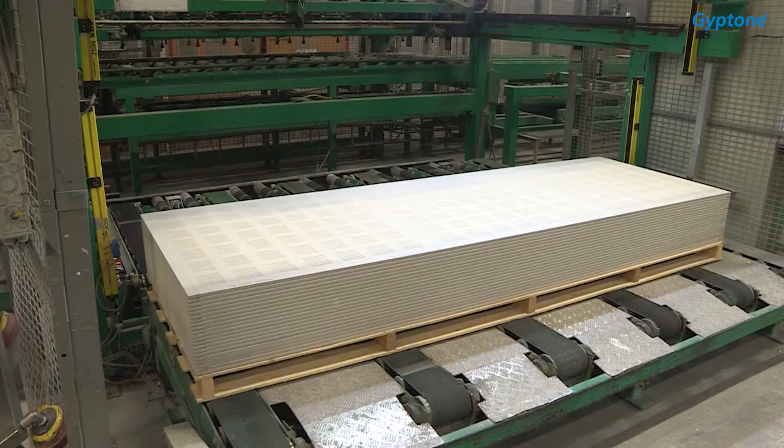Gyptone is sold and installed in more than 50 countries, with over 60 million square meters installed worldwide. Our passion is to create great living spaces by combining superior aesthetics, excellent performance, and best-in-class sustainability to improve daily life and enhance the well-being of people everywhere. Let's take a look at the next topic, design.

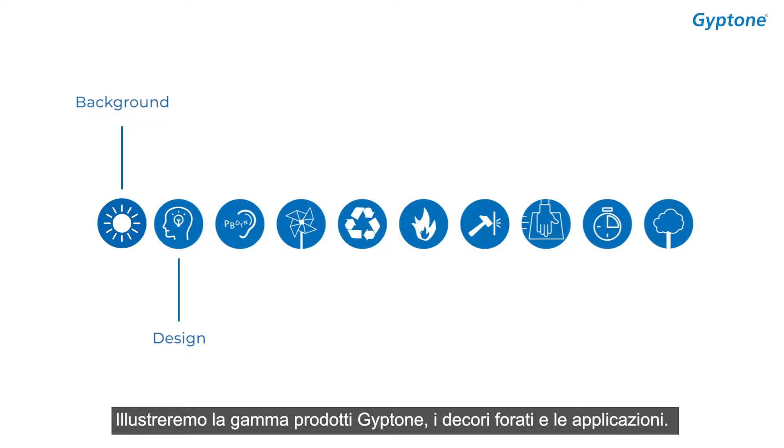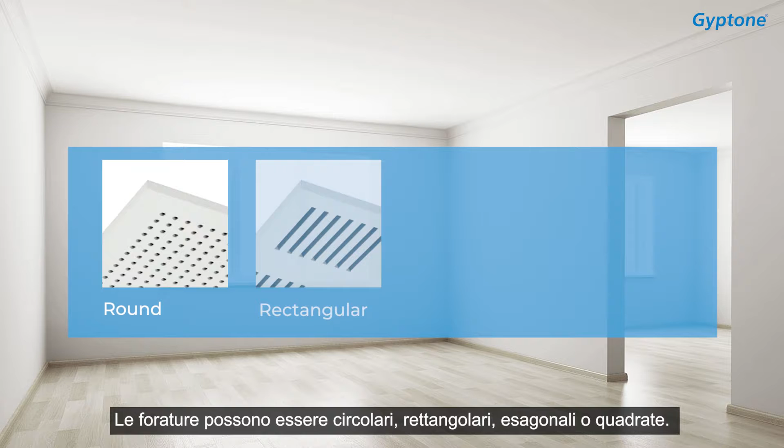This includes a review of the Gyptone product portfolio, types of perforation and applications. All Gyptone products are gypsum boards, either with or without perforations. Perforated gypsum is unique as it can be used for both ceilings and walls. The perforations can be round, rectangular, hexagonal or square.

Gyptone designs cover a range of different systems that can be used in many areas of construction, such as education, healthcare, hotel and restaurants, offices, commercial and residential. Gyptone products are divided into 5 different systems, each with its own advantages. Let's look at each system in turn.

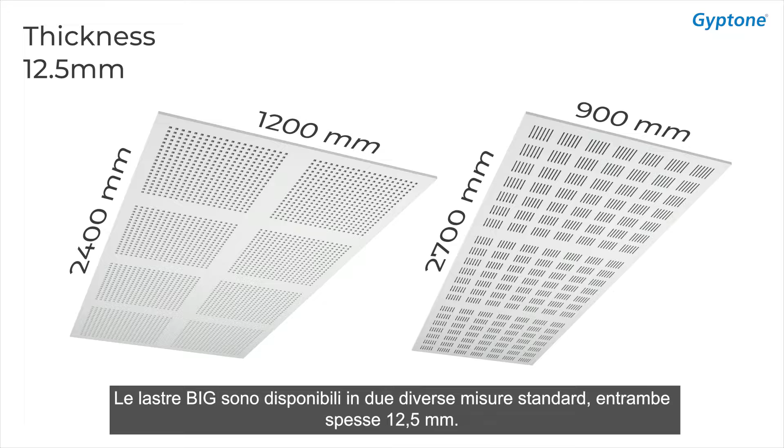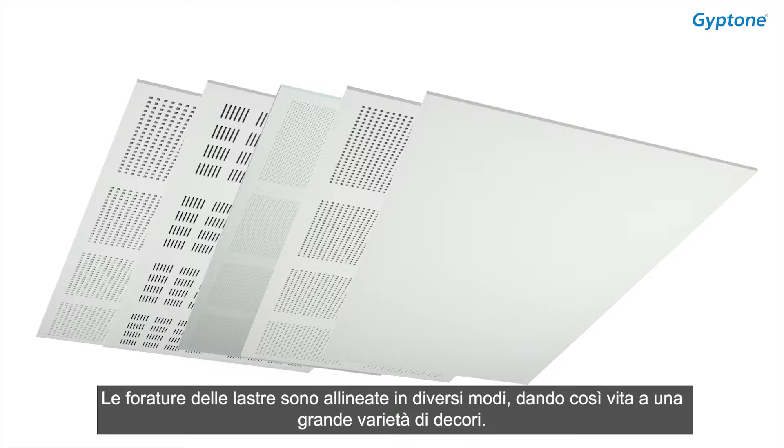Gyptone big boards are the ideal solution for large rooms that need an acoustic ceiling without any visible joints between the boards. The boards have a strong surface and even stronger connections, which makes them suitable for both ceilings and walls. We have 2 different standard sizes of big boards, both in a thickness of 12.5 mm. The range includes 4 standard perforation patterns and without perforation. The perforations are aligned in different ways, creating different board designs.

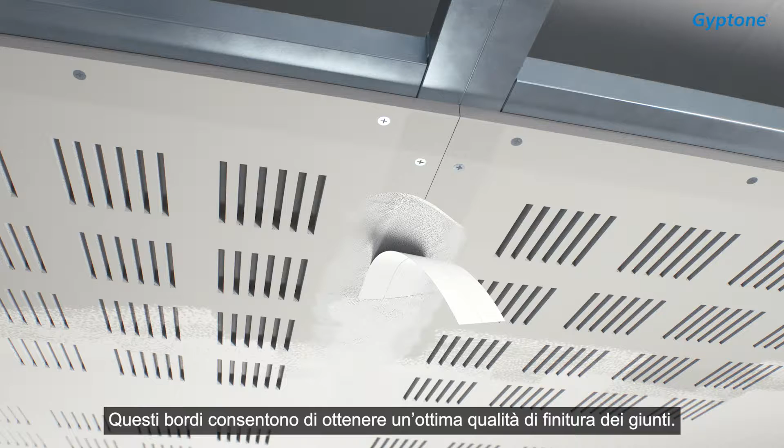Gyptone big boards are supplied unpainted, with 4 tapered edges. These edges provide a significantly improved foundation for flat filling and joint finishing. The final result is a smooth, attractive ceiling surface with no visible joints.

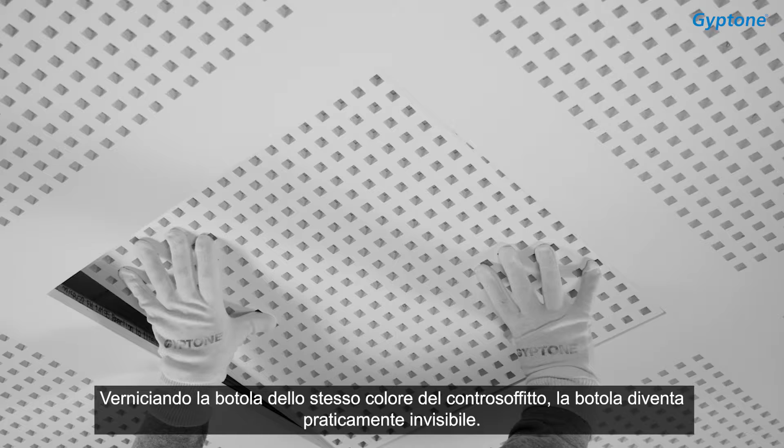Access panel. To access installations behind the ceiling, you can mount a Gyptone access panel with or without perforations. The Gyptone access panel is a gypsum-based hatch, which is fitted directly into the perforated areas of the board. The panel can then be painted in the same color as the ceiling, ensuring a seamless aesthetic solution.

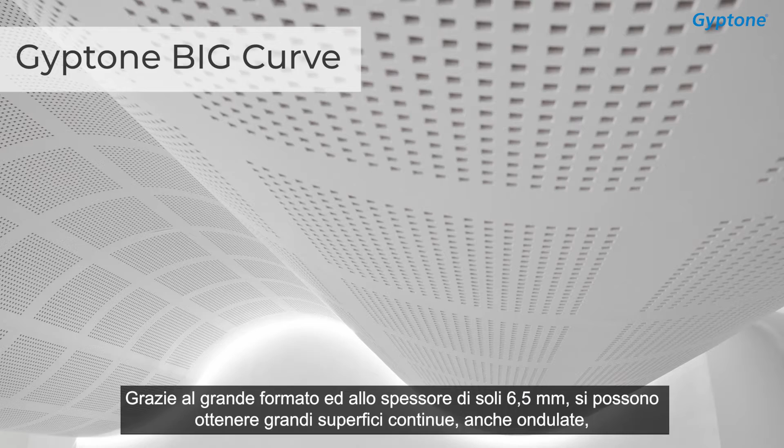Big Curve. Gyptone Big Curve enables you to create curved shapes in the ceiling. With the thin, large format boards, only 6.5 mm, you can create large, unbroken ceiling surfaces in soft waved forms without any visible joints or grid systems. Gyptone Big Curve products have long tapered edges. They are available in 3 standard perforation patterns, plus Big Curve base without perforations.

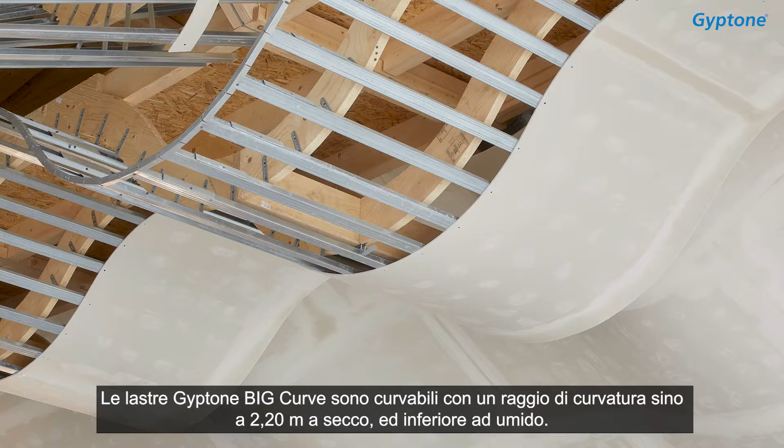Gyptone Big Curve can be combined with Gyptone Big Boards in large, continuous ceiling surfaces. There is also the potential to integrate the room's lighting as a natural part of the ceiling. Gyptone Big Curve can be dry bent to relatively small arcs, radius 2.2 meters, and to an even smaller radius by wet bending. This enables Gyptone Big Curve to be used for walls and balconies where small arches are desired.

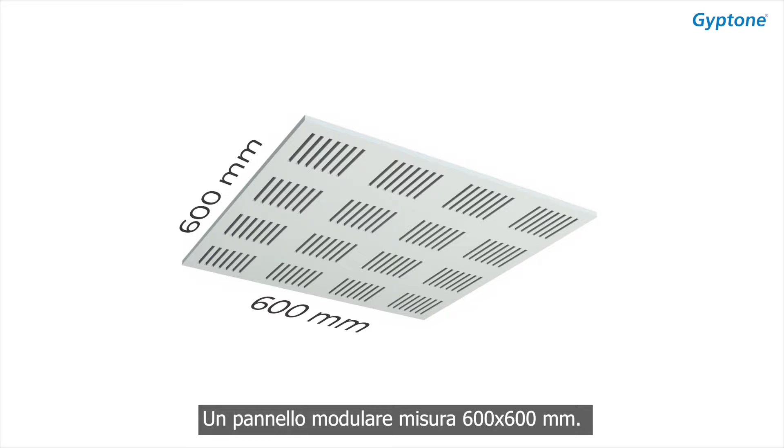Tiles. Gyptone tiles are the perfect solution for schools, offices, retail, and other environments looking to combine durability with good acoustic properties. A standard tile measures 600 mm by 600 mm. The product range includes 6 standard perforated patterns and a tile without perforation. These are aligned in different ways to create different tile designs.

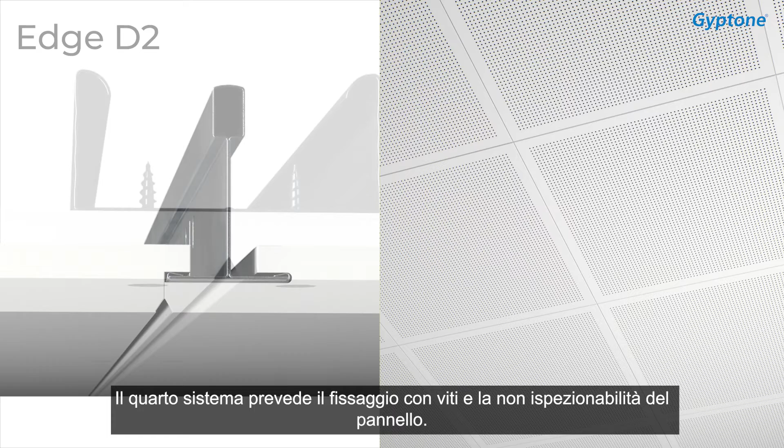Gyptone tiles are produced in 4 different edge designs: exposed grid system called Edge A, semi-concealed grid system called Edge E, concealed grid system called Edge D2. These 3 edge types are fully demountable. The 4th edge type is a non-demountable screw-fixed tile called Edge B.

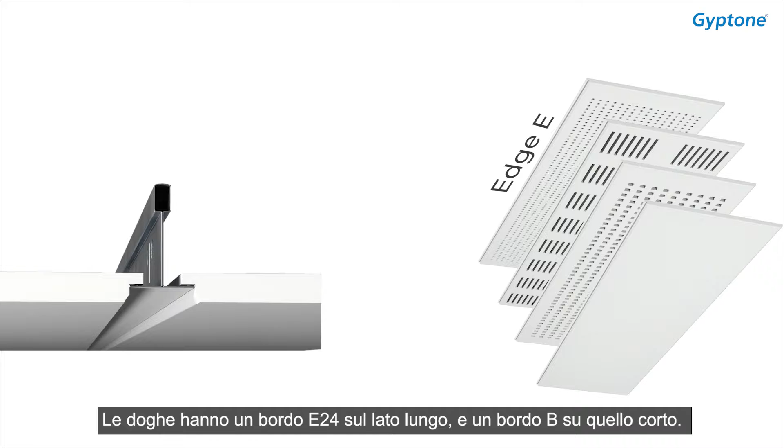Gyptone plank is the perfect acoustic ceiling in corridors and hallways where easy access to underlying installations is required. Plank product has Edge E24 on the long side and Edge B on the short end. The tiles are installed in a demountable semi-concealed grid system. If the standard 600 mm by 600 mm Gyptone tile does not meet your design needs, Xtensiv could be the ideal solution. These slim tiles create a completely different visual expression of the ceiling.

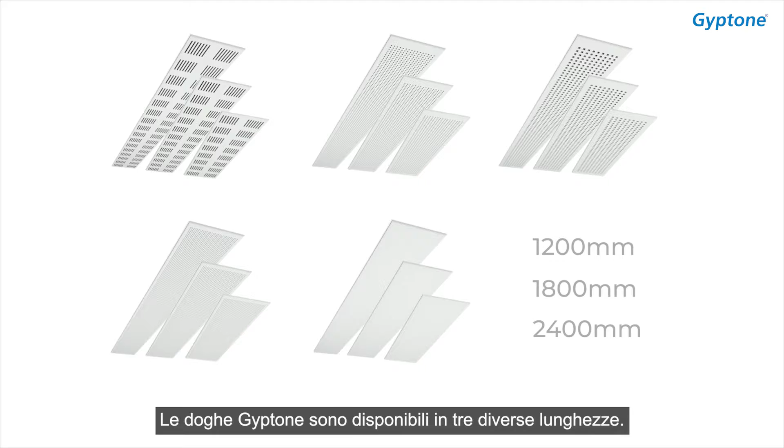Both plank and Xtensiv tiles are available in 3 different lengths. This product range includes 4 standard perforated patterns and a tile without perforation, and all can be used with either system. At just 10 mm thick, they are more ergonomic as they are easier to handle and cheaper to transport. These extended tiles can be point-loaded up to 1 kilogram.

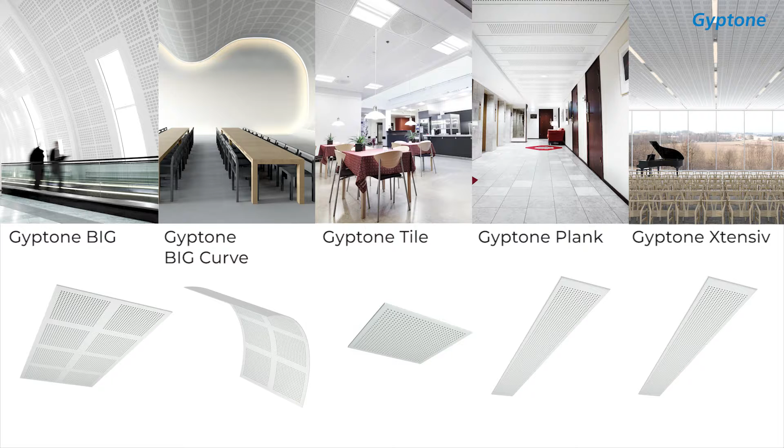The next topic is acoustics. We'll start with the basics of acoustics, so we fully understand the benefits of having a Gyptone ceiling installed. There are 4 main terms we need to understand when talking about acoustics: absorption, reflection, reverberation time, speech clarity. These terms are used to explain acoustic properties and to determine a good acoustic environment.

So, what is good or bad acoustics? The first thing to look at is absorption and reflection. An environment without any absorption means that noise will not go away and there is a very high reflection of the sound waves. With nothing to absorb the sound, the smallest noise can feel surprisingly loud and uncomfortable, like being caught in a room of glass.

Good acoustics means there is a fine balance between absorption and reflection. Nature often provides the best acoustic environment. Outdoors, such as in a forest, the balance can be just right. In these environments, sounds are heard clearly. Indoors, however, it is possible to overdo the absorption. If too much sound is absorbed, like someone talking into a pillow, you'll need to shout to be heard, and it is harder for the other person to clearly hear what you are saying. Not a good situation, especially in an environment like a school.

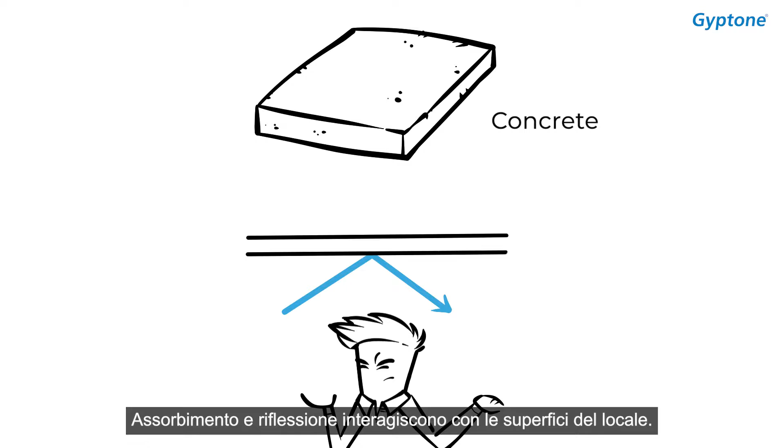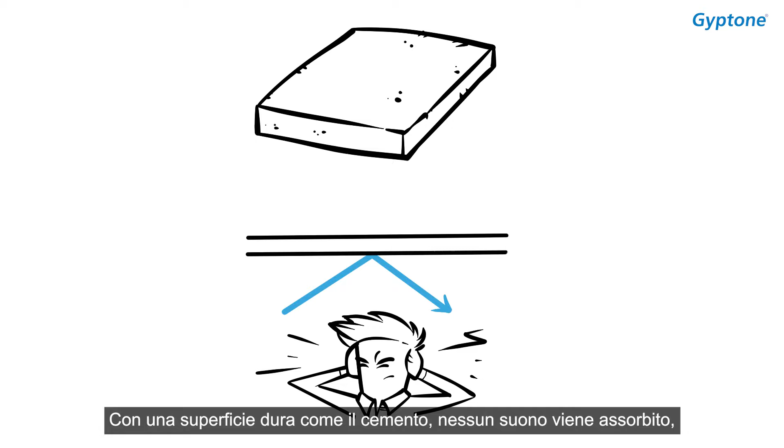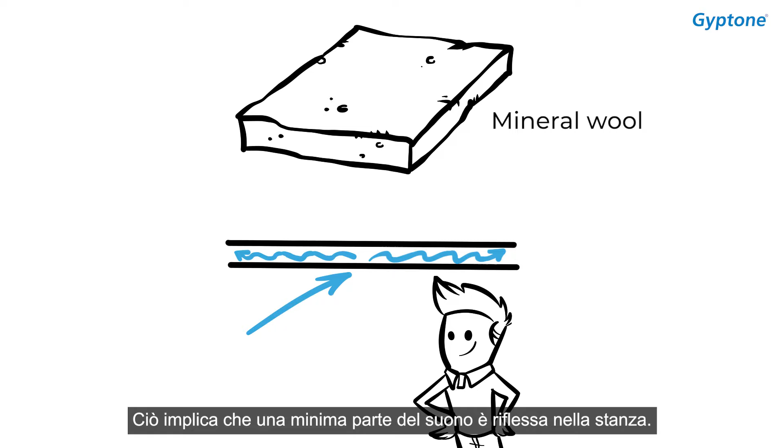Absorption and reflection relate to the surfaces in a room. Although it is not only the ceiling that contributes to absorption and reflection, it has a big impact because it is such a large surface. With a hard surface like concrete, no sound is absorbed. Instead, it is all reflected back into the room. When sounds hit porous surfaces like mineral wool, carpets, or curtains, they are mostly absorbed. This means that very few sound waves are returned into the room.

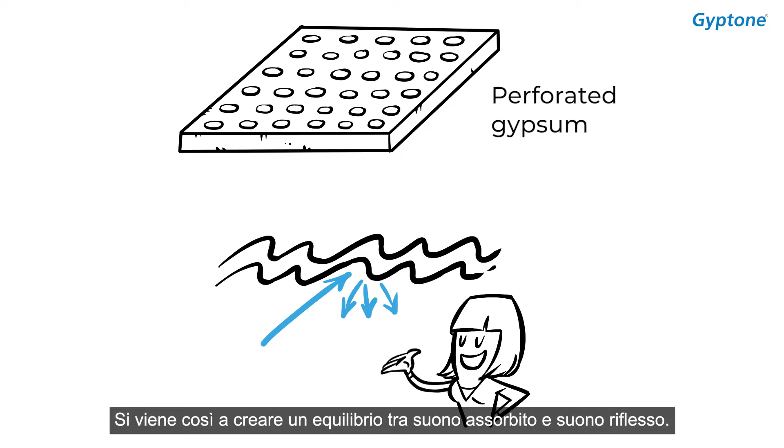With perforated gypsum, most sound waves are absorbed, but some are reflected. This creates a balance of absorbed and reflected sound waves. Because Gyptone products are perforated, we call a perforated gypsum board a diffuse surface. So why does perforated gypsum absorb sound so well when gypsum is a hard product? Take a look at this short video to understand how Gyptone products work in absorbing sound waves.

When a room contains only hard surfaces, it's bad news for our acoustic comfort. With nothing to absorb them, sound waves are free to reflect and bounce around the room, leading to uncomfortable, distracting and stressful noise levels. Installing a gypsum ceiling that's specially designed to improve the acoustics in a room transforms the sound environment. Let's take a closer look at how it works.

When you use a perforated plasterboard rather than a smooth ceiling, the surface is no longer hard, giving space for some of the sound waves to be absorbed. The back of the plasterboard is also fitted with an acoustic tissue, absorbing and breaking up even more of the sound waves as they pass through the perforations. Here's what happens when sound waves hit the perforated surface.

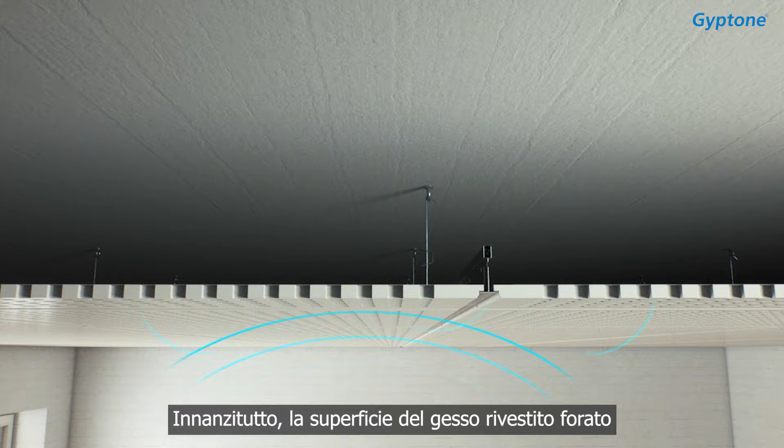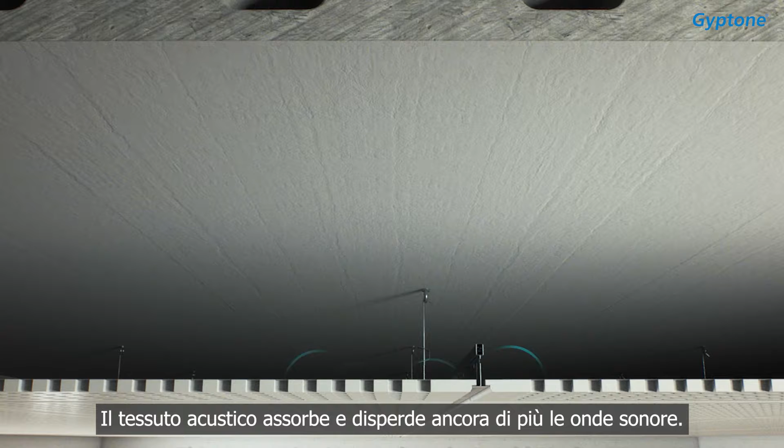First, the surface of the perforated plasterboard reduces the energy of the sound waves before reflecting part of them back into the room. Meanwhile, the remaining sound waves pass through the board and up towards the acoustic tissue. The acoustic tissue absorbs and breaks up the sound waves even more. Only very low energy sound waves remain, bouncing around in the empty space above the boards, and only an even smaller fraction of these low energy waves make it back into the room. By using acoustic gypsum ceilings, you can control reverberation time, increase speech clarity, and create a more pleasant acoustic environment.

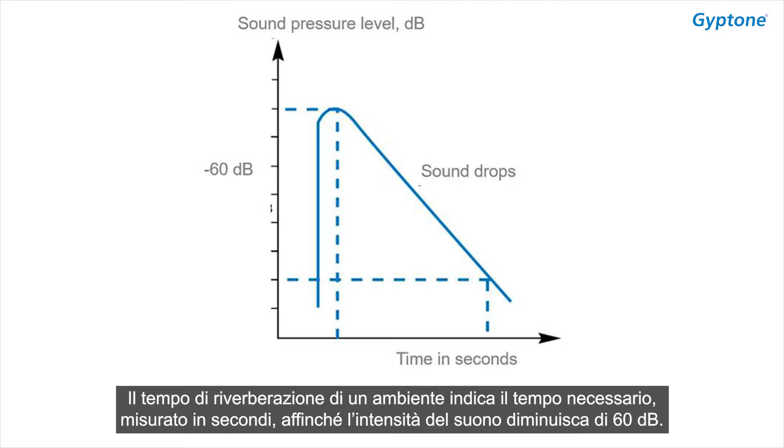To figure out if you have good or bad acoustics in a room with high or low absorption, we use the term reverberation time. The reverberation time is the time it takes the sound pressure in a room to drop 60 dB, measured in seconds. Let's listen to the same sound but with 3 different reverberation times. Can you hear the difference? First, listen to a reverberation time of 2 seconds.

I wish I'd done something I could be proud of.

This is very long, like you might find in a church. The next reverberation time is much shorter. This time we are down to 0.5 seconds, which is common in classrooms and some offices.

I wish I'd done something I could be proud of.

Finally, we have a reverberation time of 0 seconds. This means that all sound waves are absorbed and no reflection is present.

I wish I'd done something I could be proud of.

Like the first sound with a very long reverberation time, a very short one can also be harmful to the acoustic environment.

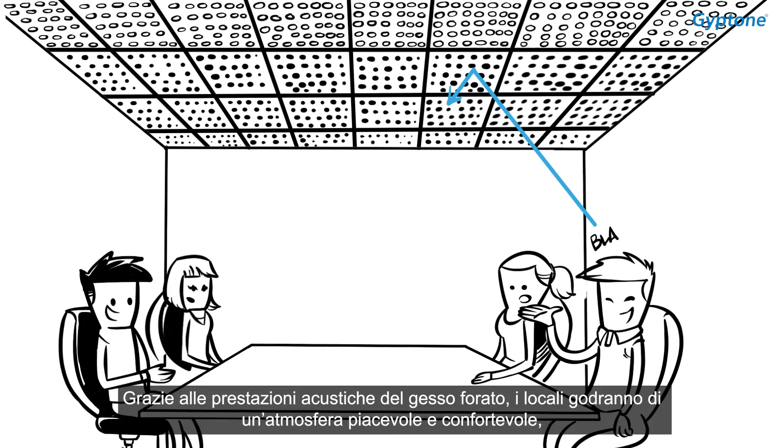In a room with poor acoustic performance, sounds will reverberate constantly, creating an unpleasant and uncomfortable acoustic environment due to the long reverberation time. But with the acoustic performance of perforated gypsum, rooms benefit from a pleasant, comfortable atmosphere, ideal for productive workplaces due to the optimum level of absorption and reflection.

Let's look at a common example where Gyptone products can help create a pleasant acoustic environment. Good acoustic comfort is the ideal acoustic environment due to an appropriate acoustic reverberation time and high speech clarity. Congratulations on your dream home. Very nice, with hardwood floors, vaulted ceilings and large windows, energy efficient, stylish and modern.

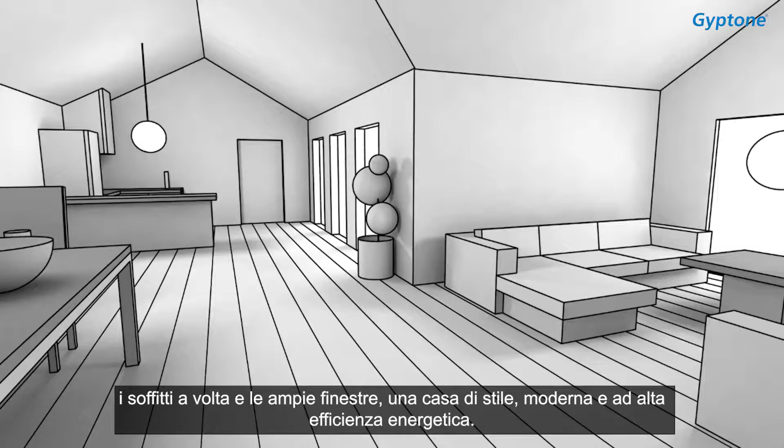But why does it sound like this when you try to have a conversation over dinner? Why does it sound like a train station when the boys are playing at the other end of the house? Or when Louise is cooking? And you can barely hear yourself think when Sophie is talking on her mobile and the dog is barking. These everyday sounds become noise as they're bounced around the rooms, creating a poor sound environment.

But there is a good solution. Lining your ceilings with acoustic boards that absorb the noise will create a peaceful and pleasant sound environment in your new home, and you and your family can talk in a normal tone of voice.

Gyptone acoustic boards have a fine perforation that, coupled with the underlying tissue, provides excellent acoustic properties. The boards are integrated as a natural part of the remaining ceiling, without visible joints, giving the ceiling a beautiful and uniform look. But first and foremost, you get a quiet and comfortable home.

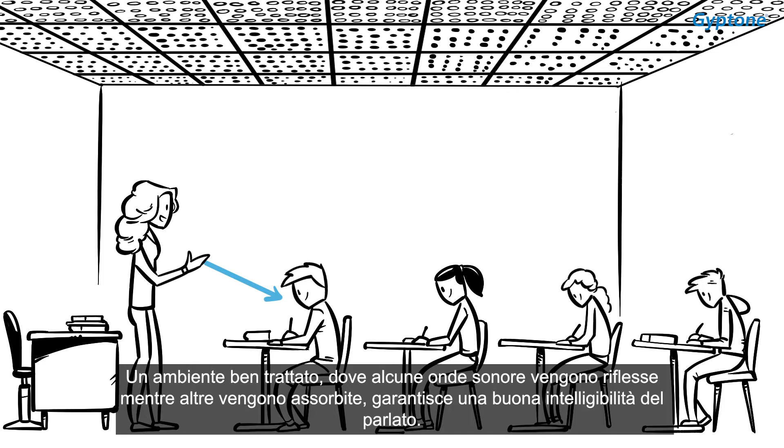A sound-regulated environment, where some sound waves are reflected while others are absorbed, ensures good speech clarity. Good speech clarity is equally important in homes as in classrooms, where it is important to deliver a message from one person to another, especially in a classroom where students sitting at the back need to hear the teacher just as clearly as those sitting at the front. This is vital to students' ability to learn, as has been proven in many studies.

Let's see how we can improve both the reverberation time and the speech clarity in a classroom. This is a typical medium-sized classroom. Everything in a room influences the acoustic environment. If a room has nothing in it and just hard surfaces, it will produce a very long reverberation time, and it will sound like this. You are seated in the back of classroom 19 from building 352 in DTU.

To optimize the acoustics in a room like this, we need to add some absorbing material, like a Gyptone ceiling. Furniture will also be added to the room. Just by adding a Gyptone ceiling, we can lower the reverberation time to make a pleasant sound environment for students and teachers. You are seated in the back of classroom 19 from building 352 in DTU.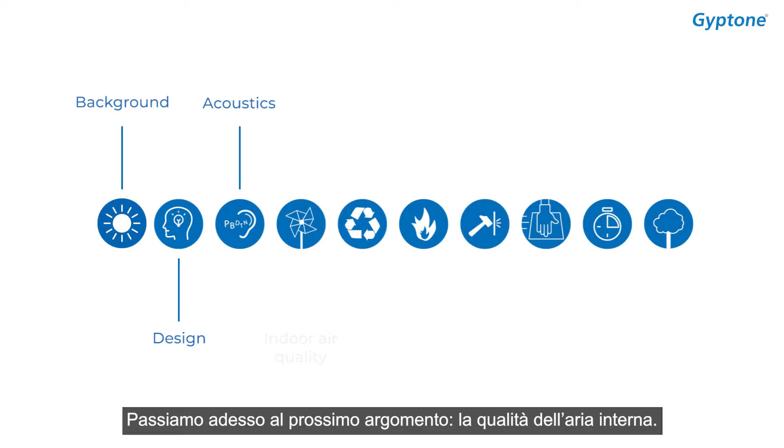Now we'll move on to the next topic, indoor air quality. Gypsum is a natural product. Most of the gypsum used for Gyptone products comes from quarries in Spain. Natural gypsum is such a clean product that it is used in many other applications other than plasterboard production, such as brewing, chocolate, toothpaste, and many others. So, the next time you eat a Kit Kat, look for gypsum in the ingredients.

Gyptone products are made only from gypsum's all-natural ingredients. No harmful substances are used. Gyptone products are able to achieve some of the toughest indoor climate certifications. Gyptone ceilings have received the highest approvals in indoor climate tests from Danish indoor climate ratings, A+ and M1, meaning they contribute to a healthy indoor climate.

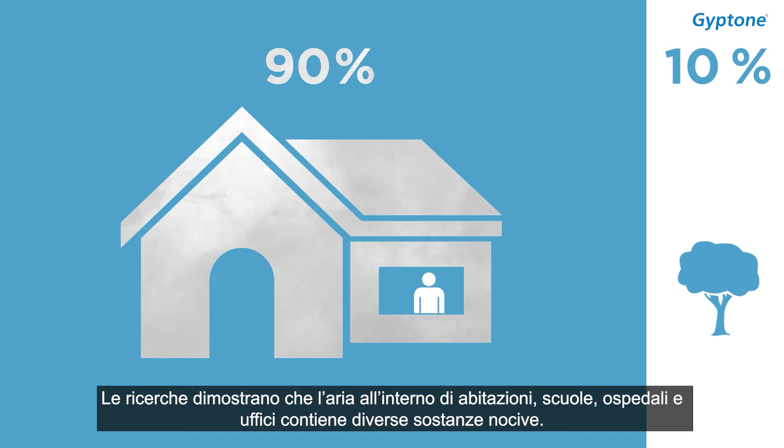Gyptone is not only a very clean product, it also helps to clean the air of harmful substances from its surroundings. This short film we are going to watch now explains how Activ'Air contributes to a better and healthier indoor climate. People spend approximately 90% of their time indoors. Research has proven that there are many harmful substances in the indoor air of residences, schools, hospitals, and offices.

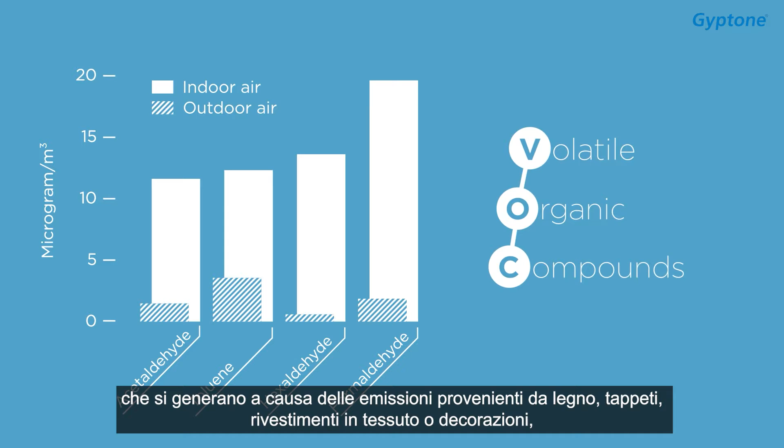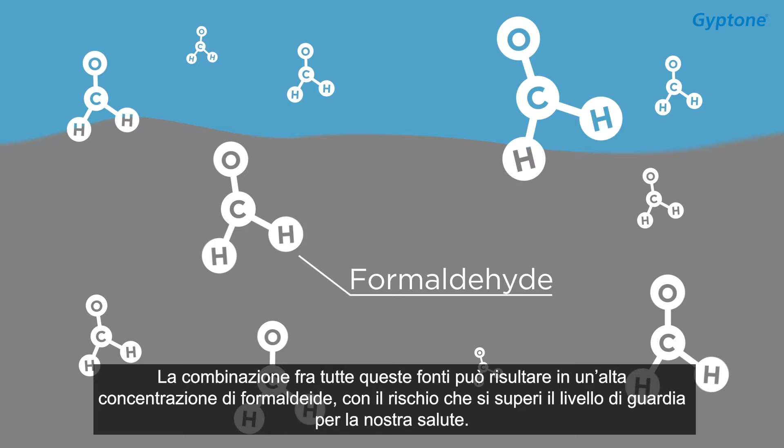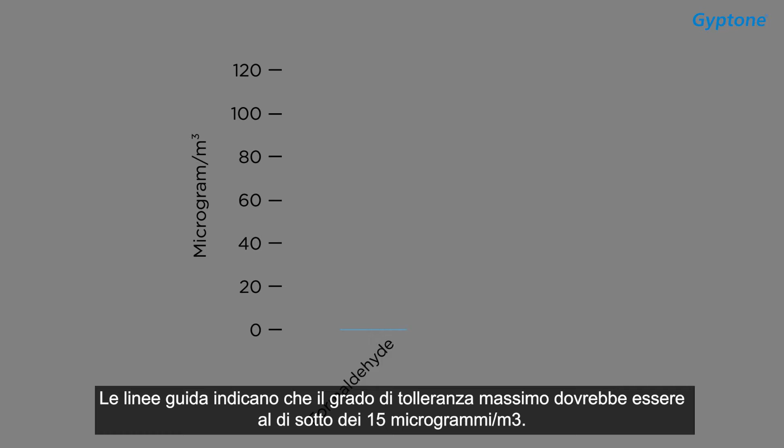These harmful substances are mainly present in the form of volatile organic compounds, or VOCs, and appear due to the emissions from wood, carpet, fabrics used for furniture or decoration, and people's activities such as cooking, cleaning, ironing, heating. The combination of these sources can create a very high concentration of formaldehyde, exceeding what our health limits can tolerate. Symptoms can be burning and watering eyes, burning of the nose and throat, coughing, and difficulty in breathing. Guidelines indicate the maximum tolerance should be below 15 micrograms per cubic meter.

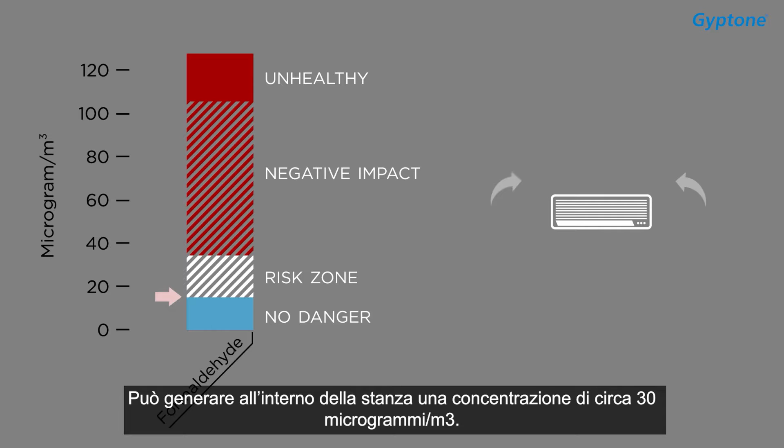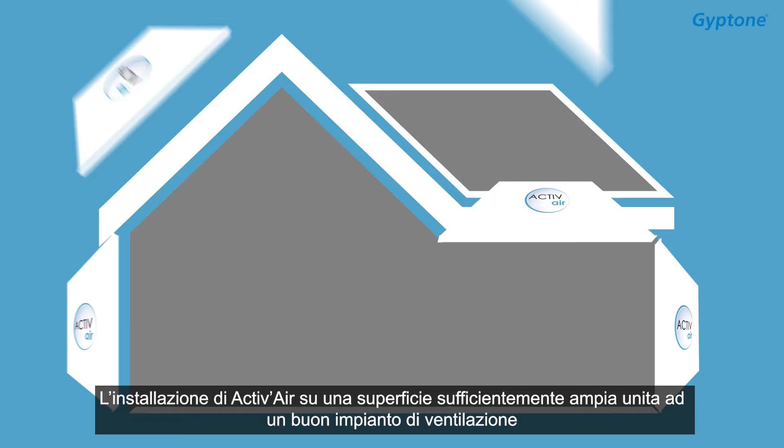Even with a ventilation system installed, in line with the guidelines, it is still possible to have a room with a concentration around 30 micrograms per cubic meter. This is why Saint-Gobain has developed a technology that removes formaldehyde permanently out of indoor air by transforming the product into an inert compound: Activ'Air. Only with a sufficient surface of Activ'Air installed in a room combined with well-performing ventilation will one achieve safe levels of formaldehyde in the indoor air.

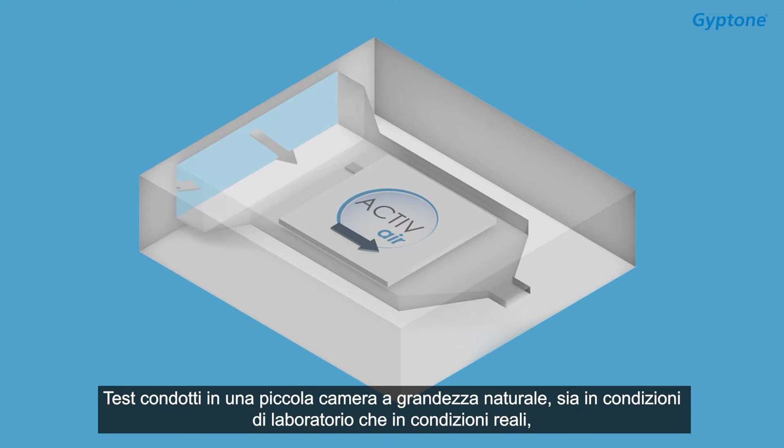The effectiveness of the Activ'Air process has been proven by tests conducted in all kinds of circumstances. Tests performed in a small chamber, on a real-life scale under laboratory conditions, and in real life have proven that Activ'Air absorbs 70% of the concentration of formaldehyde. These results easily prove that Activ'Air can create a healthier indoor environment.

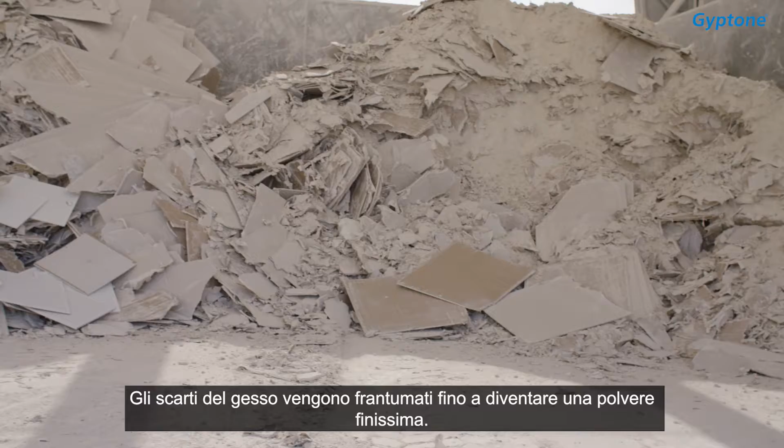Gyproc has an established recycling system that collects gypsum waste from demolition sites, building sites, and recycling stations for use in new gypsum products. All the gypsum waste is crushed and separated into fine gypsum powder. The gypsum powder from the recycled gypsum products is now ready to become new gypsum products, together with the natural gypsum. Gyptone products consist of more than 25% recycled gypsum.

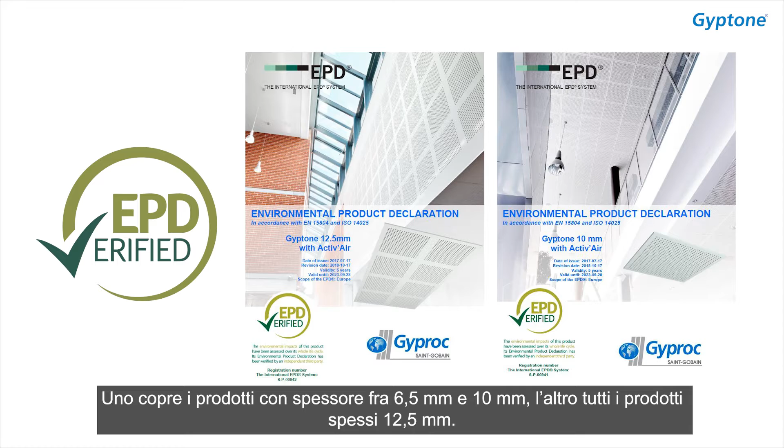To lower Gyproc's environmental footprint when producing gypsum products, we take care of having updated EPDs on our Gyptone products. Gyptone has 2 EPDs which are third-party verified. They cover all Gyptone products and are divided by the thickness of the products, one covering 6.5mm and 10mm products and the other covering 12.5mm products.

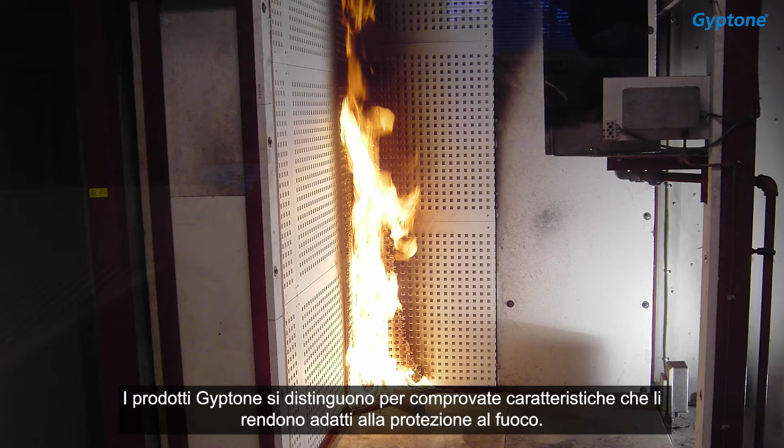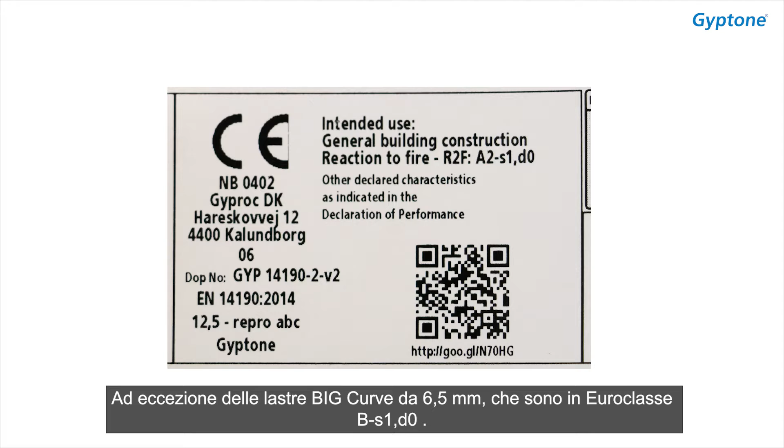The next topic we'll look at is fire. Gyptone products have some unique, well-proven fire protection characteristics. All Gyptone products are tested as part of the CE marking system. These tests show that our products can achieve a reaction to fire classification of A2-s1,d0, except the 6.5mm Big Curve product, which has a classification of B-s1,d0. As part of the CE marking process, we also have verified DoPs, Declarations of Performance, for all our products in many different languages. These can be downloaded from the Gyptone website.

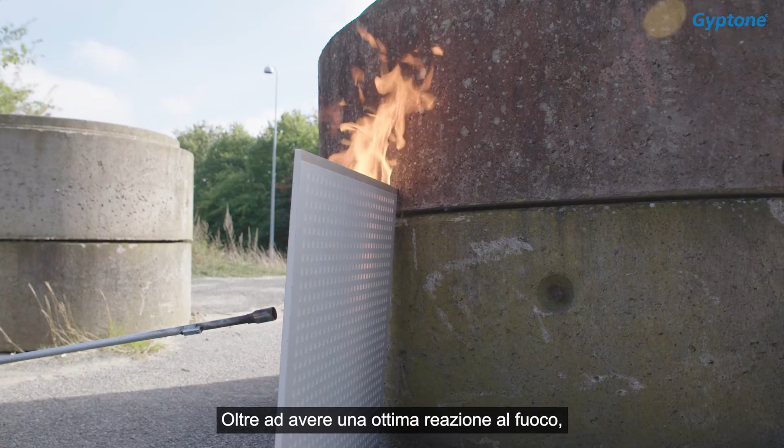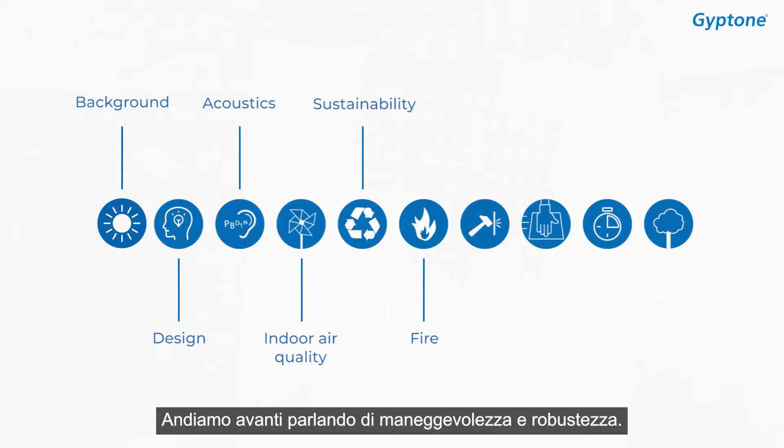Gyptone products do not only have a high reaction to fire classification, they can also fire protect up to 10 minutes in applications where the product is screw attached to a subframe of wood or steel. You might wonder how this is possible, with perforations running through the product. It's because the gypsum core is made from 20% crystallized water. This acts like a built-in sprinkler system. When the crystallized water is subjected to heat, it releases a cooling vapor that lowers the temperature from the fire. This prevents the liner and acoustic tissue from catching fire, and means the Gyptone product is fire protected for up to 10 minutes.

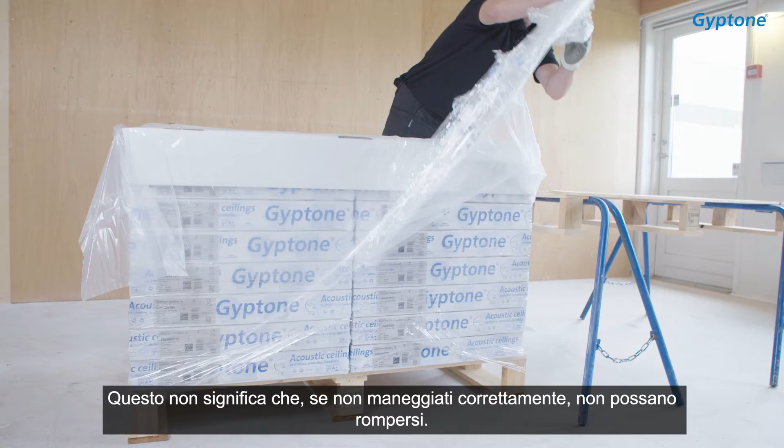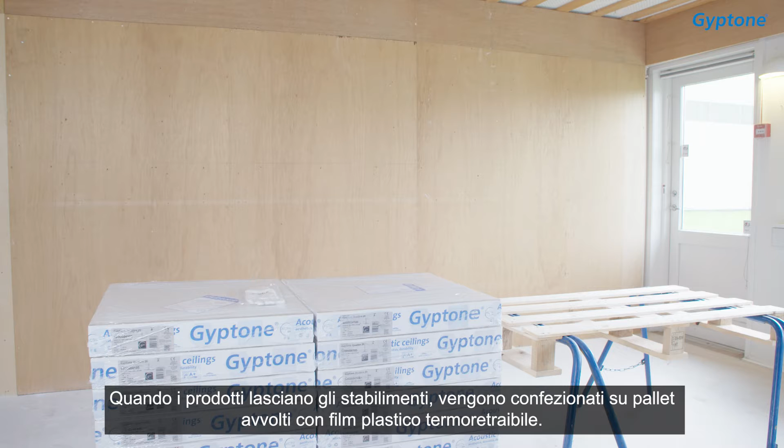Next up, let's explore handling and robustness. Gypsum products are robust, which makes installation easier and less stressful. But it doesn't mean they cannot break if not handled correctly. They need to be protected from external elements like rain and snow, and you should be careful not to bump into hard objects that could damage them. When the products leave the factory, they are well protected with shrink-wrapped plastic and placed on a pallet. Each pallet comes with a pair of gloves to protect the products during handling, plus a handling manual for that specific product.

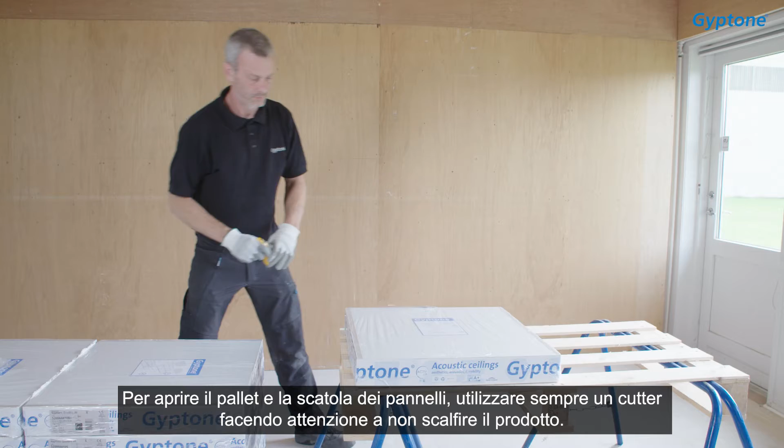You should always use a knife to open a pallet and a box of tiles, taking great care not to cut into the products inside. When cutting into a box of tiles, always cut into the cardboard and not the top of the box, to avoid cutting into and damaging the tiles.

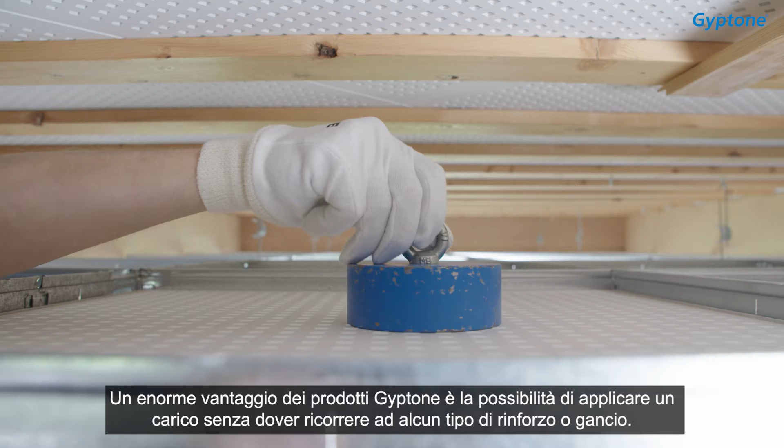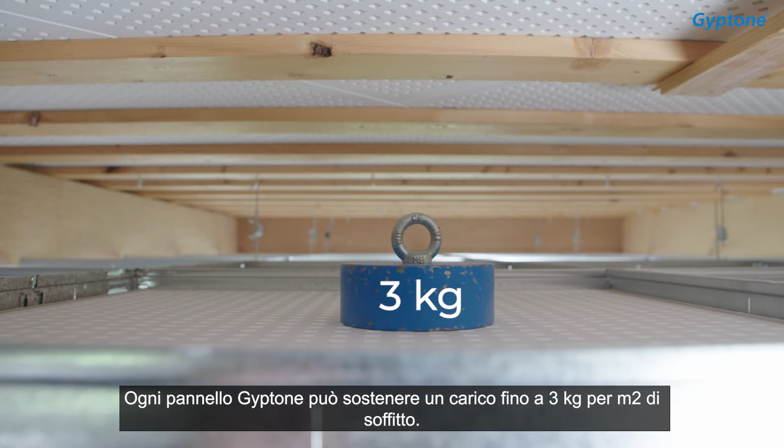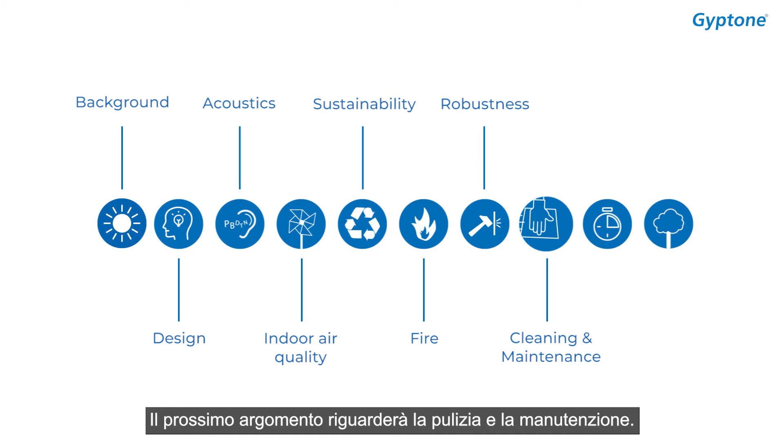The next topic is cleaning and maintenance. Many Gyptone tiles come with a painted surface.

Even though it is durable, the surface can still get damaged or dirty during installation. For seriously damaged tiles, the best solution for demountable tile systems is simply to replace the tile. A common issue is dirty finger marks on factory-painted products, usually due to handling during installation or infrastructure maintenance. The first lesson is always to use gloves when handling painted Gyptone products.

When painting a perforated plasterboard, however, there are some things to bear in mind. Always use a short-haired roller. Never use spray paint. This is to avoid contaminating the acoustic tissue on the back of the product with paint. If paint gets on the acoustic tissue, the acoustic performance will be affected, as it becomes harder for the sound waves to penetrate. The next topic we'll look at is installation.

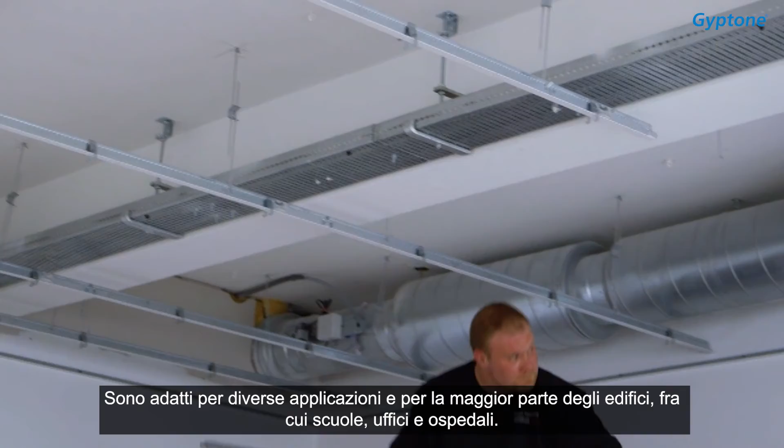Gyptone ceiling systems are some of the most versatile ceiling systems on the market. They are suitable for many applications and most segments, such as schools, offices, and healthcare facilities. One of the big benefits of Gyptone ceiling systems is the ease of installation and the guidance and support available to ensure installation goes smoothly. On the website, there are installation manuals and videos for all systems. Let's look at an installation video in more detail.

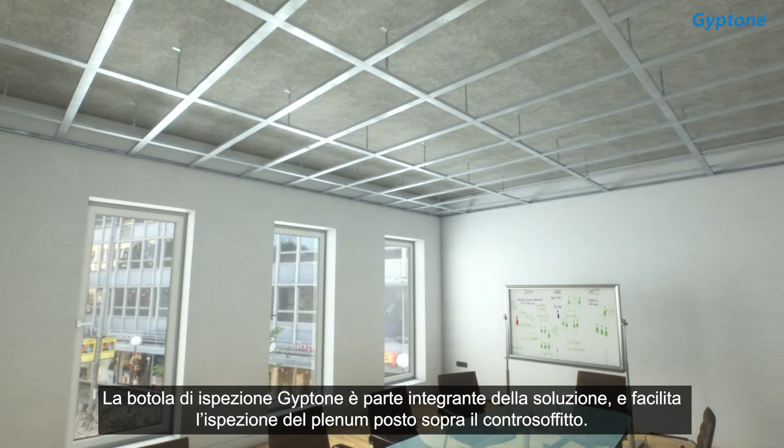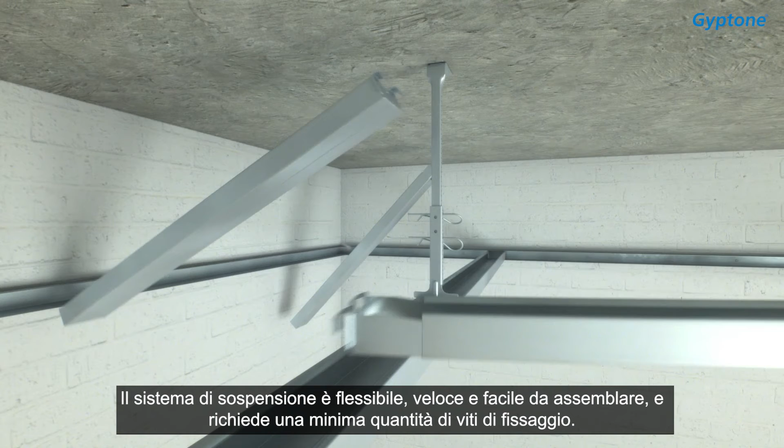The system we'll look at is Gyptone Big System, installed on a metal grid GK system in one level with an access panel. The Gyptone access panel is part of the big ceiling system and makes it easy to inspect the cavity behind the ceiling. GK system in one level is usually used for the big system, but many other types of metal grids and even wooden beams can be used. The GK system is fast, flexible, and easy to assemble. It's what we call a click system with minimum use of screw fixings.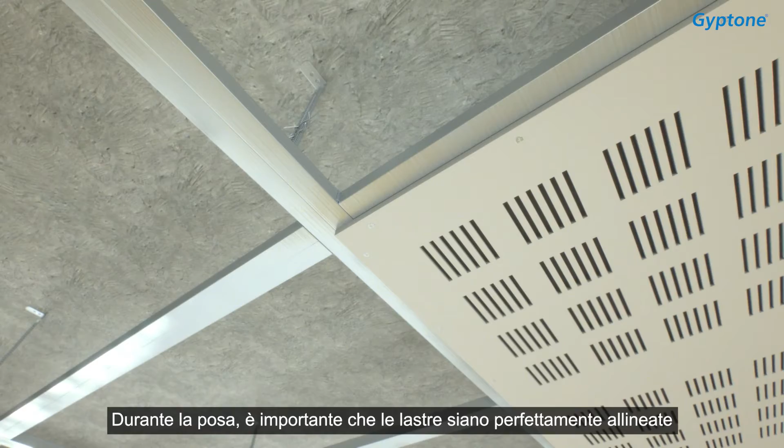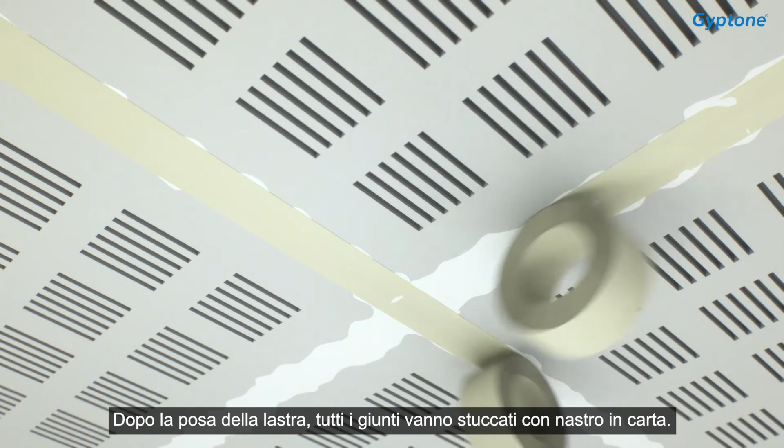During installation, it's important that the boards are perfectly aligned and fixed to the grid with the appropriate screws, spaced correctly according to the advice for that product. After board installation, all joints need to be covered with filler and paper strips. This will make a strong and long-lasting connection. The final part of installation is to paint the surface. This can be done with any color, but remember never to spray paint a Gyptone ceiling. Gyptone Big is an aesthetically beautiful ceiling with no visible board connections.

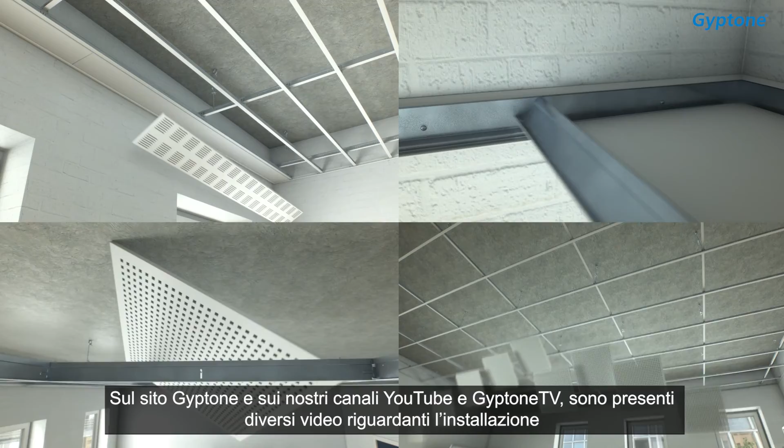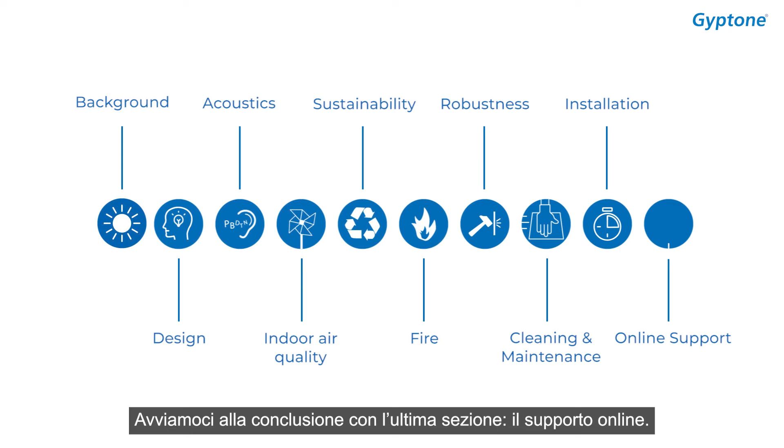On the Gyptone website and our YouTube channel, Gyptone TV, there are a wide range of installation videos for all Gyptone ceiling systems, helping to ensure an easy, accurate, and aesthetically perfect installation every time. Finally, let's finish with the last section: online support. During this video, we've explored a number of key topics around Gyptone products. But that's not all. There are also various sources of information online to help you get to know the products, their characteristics, their benefits, and how to use them.

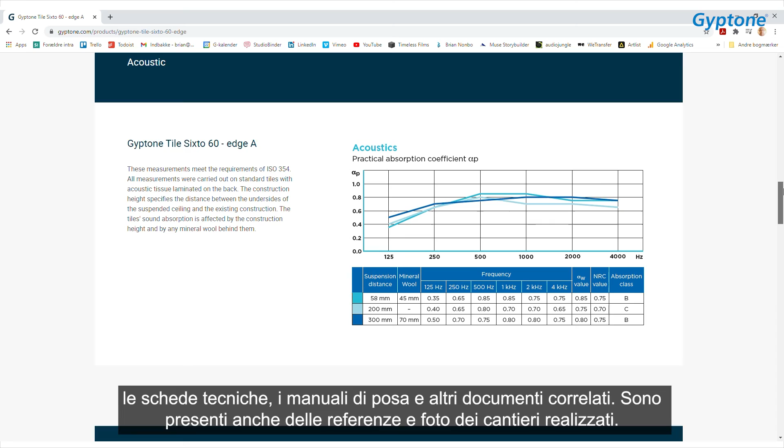On the website gyptone.com, you can find information on all our products, product specifications, data sheets, installation manuals, and other related documents. You can also find references and see pictures of projects. From the website homepage, you can access the Partner Portal. This is for Saint-Gobain employees only, and you need a Saint-Gobain email to sign up. On the Partner Portal, you can find contact details for everyone in the global Gyptone team.

There are open-source InDesign documentation files for datasheets, installation manuals, and brochures. This will allow you to quickly make local adaptations, such as language changes. You can also download certificates. You can also find a photo library of all Gyptone products and downloadable Gyptone PowerPoint presentations, including the latest version of our Master Sales presentation.

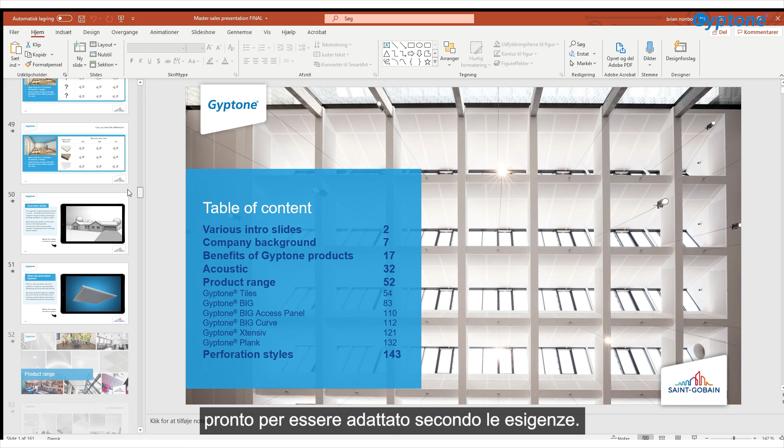What is the Master Sales presentation? The Gyptone Master Sales presentation is a PowerPoint presentation with over 150 slides, ready to use in your next presentation. Simply drag and drop the slides you need and translate them into your own language. We also have a visualizer tool on the website that enables you to see and replace Gyptone ceilings virtually in different environments. So, we've reached the end of this introduction to Gyptone and our products.